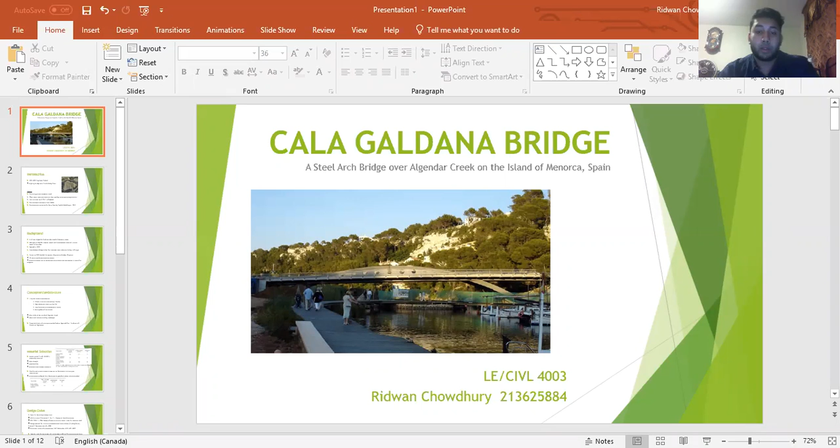Good evening. My name is Ridwan Chowdhury, and welcome to my presentation about the first stainless steel vehicular bridge in Europe. Let's get to it. All right, so we'll start off with an introduction.

So when I first set out looking for projects to research for this project, I was actually pulled towards bridges. And this is mainly because our CIVL 4000 project is actually a highway bridge over Credit Valley River. It's actually a reinforced concrete box girder bridge. Although our specialization this semester wasn't in structural, I thought it'd be interesting to learn a bit about a road bridge that utilized steel instead, and possibly use that knowledge for capstone as well.

So let's start with a little history of bridge materials, get some historical context. So the earliest bridges actually were made of wood. Following that, began the use of stone and low-quality concrete. Iron wasn't used as the primary bridge support until 1741 in England. Steel eventually became a common material in bridges in the late 1800s.

In 1912, an English metallurgist named Harry Brearley was actually looking for a corrosion-resistant solution for gun barrels, I guess very likely for wartime. So long story short, the start of the industrialization of stainless steel was around the early 1900s. And it didn't take long for stainless steel to be recognized by prominent engineers. So now that we have some historical context, let's move on to the project of concern.

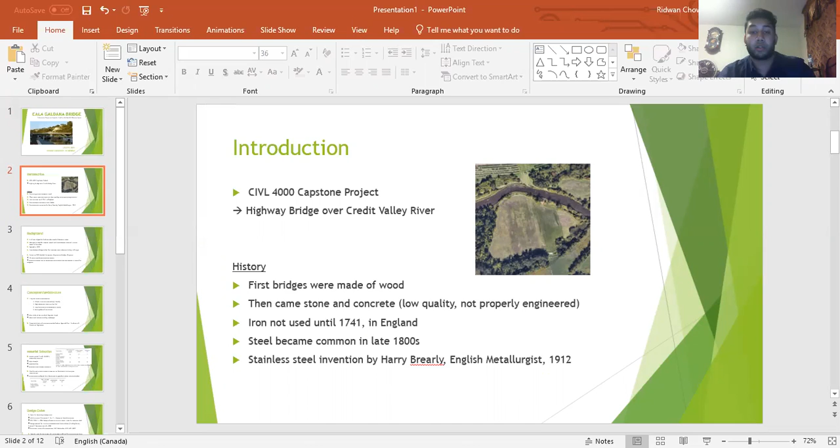So we'll start with some background. So this steel bridge was built on the rocky coast of Menorca, Spain. Menorca is actually a Mediterranean island. It spans 55 meters over the Algendar Creek, and it opened in 2005. Cala Galdana is one of the most beautiful beaches around these islands, so that's the name of the bridge itself.

So why was this bridge even needed? Why was this project even conceived? Well, it was needed to replace the previous bridge, which was made of reinforced concrete, which had become corroded due to the marine, saltwater, and coastal environment. Basically, it had lasted 30 years until finally the owners decided in 2003 that it was time for it to go. Yeah, that's pretty much a little background on the bridge itself.

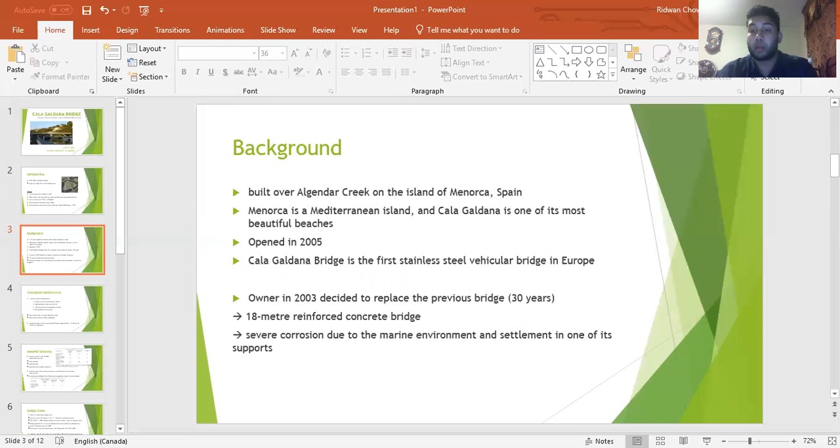So let's go into conception. In terms of conception and architectural design, in 2003, the owner had 4 key requirements for the architects and engineers at Pedelta. Pedelta is the firm responsible for the bridge design as well as architecture, and they were based in Barcelona, Spain. The 4 requirements were that it had to be environmentally friendly, it needed high durability, so a long service life, it required minimum maintenance, so lower maintenance costs,

and it had to be a symbol of innovation as well. And the width of the mouth of the creek, which the bridge had to cross over, was around 40 meters, so another constraint there. Tourism revenue is also very important in this area. So a material which blends in with the natural surroundings and causes minimal disruption. Quick construction was heavily required and desired. This eventually prompted the choice of stainless steel by the firm responsible, but we'll get to that in the next slide.

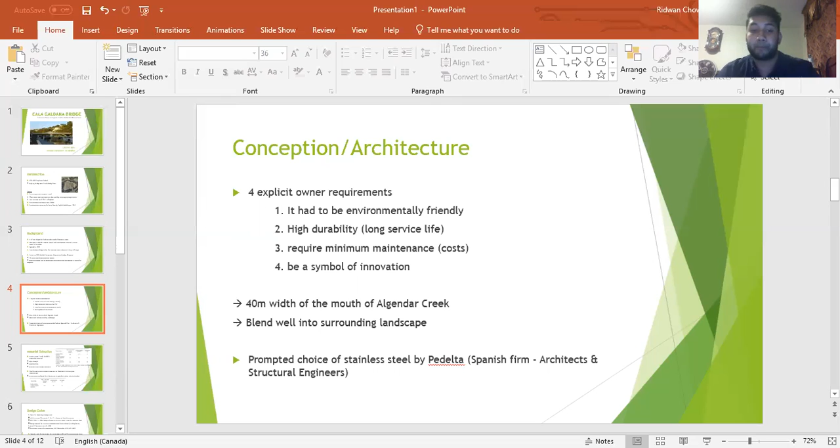So material selection. Due to these different requirements and objectives, different grades of carbon steel and stainless steel were considered. And these were considered rather than concrete, given the issue with the previous bridge. This was also to appease the innovation request, so as to have the first stainless steel road bridge in Europe, which is a pretty big feat in itself. The table in the top right of the slide was taken from a European standard, and it shows the grades considered when selecting the material. The duplex grade 1.4462, you can see that in the 3rd row of the table.

It was eventually selected because of its high strength, exceeding most regular steels, because of its high ductility and durability in marine environments, resisting corrosion from chlorides, as we learned in class. Post-construction quality control tests were carried out to make sure everything was fine, and they exceeded expectations for the material. Another point to note is that stainless steel is 100% recyclable, and a large percent of it is made via recycled materials. So this also appeased the environmentally friendly request as well.

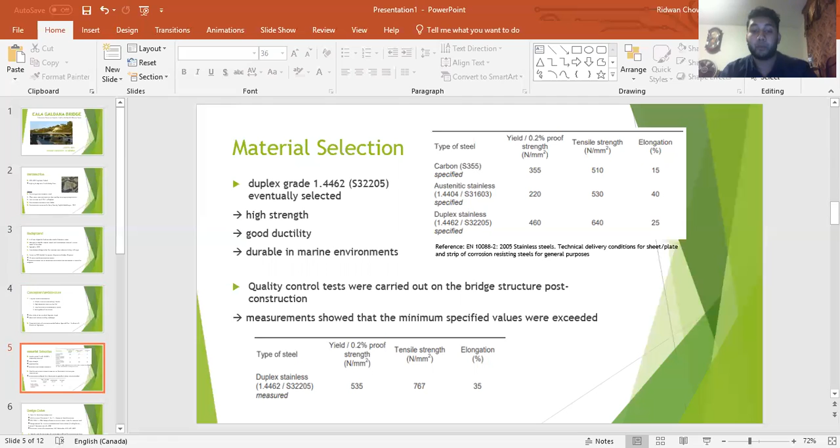Well, let's get further into the engineering part a bit more. The governing code used was a Spanish code for design of steel bridges. This was key for making recommendations in regards to compliance and obviously the verification of resistance at the ultimate limit state, ULS, and the serviceability limit state, SLS.

The other codes or standards used were similar to the steel handbook that we've studied throughout this course. Even comparing their table of contents, there was a lot of overlap. That would be expected, of course. Some of these design manuals include the Eurocode 3 Part 1-4, design of steel structures, as well as manuals for stainless steel specifically.

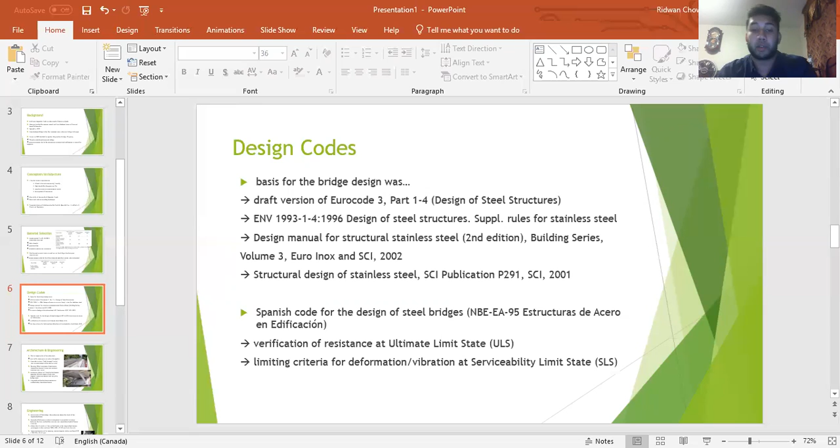Moving on, let's get right into the design. So the bridge covers 40 meters width of the creek, with a 55 meter total length, but the main span of the bridge is about 45 meters. The deck is 13 meters wide. It encompasses 2 lanes of traffic and 2 pedestrian walkways, separated by a low concrete wall and arches, as you can see in the image in the top right. It'll help you visualize it.

According to the Spanish code, the typical ratio of rise to span for a steel arch bridge is in range from 1 to 5 to 1 to 6, because if the arch is too flat, the secondary bending effects can become extremely large and result in a pretty uneconomical design. Bearings were fitted into the base of the abutments, and they transmit the horizontal forces into inclined stainless steel struts rather than into the foundations.

So the arches are joined to 2 longitudinal beams spanning the full length of the bridge. The bridge behaves like a self-anchored arch in this way, and that's helpful because you don't need ties then. Longitudinal beams support transverse beams as well, you can see in the picture in the bottom right, and those carry the bridge deck. Composite action between the deck and the transverse beams is achieved by shear connectors, and those are welded along the transverse beams.

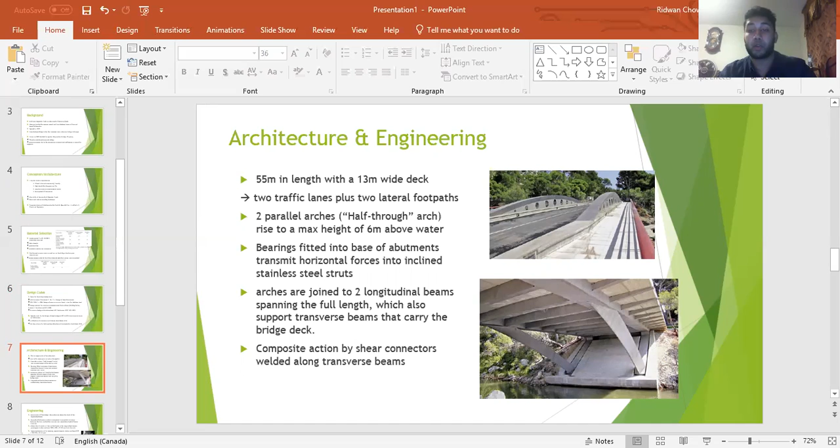All right, if we continue on, we can see that the arches have a triangular cross section with a central web and a depth of 700 millimeters. In the central zone of the bridge, the arches actually rise above the longitudinal beams, and throughout the zone there's a cellular steel plate connected vertically between the two, so that the cross section is almost kind of like a hybrid I-beam structure. You can see in the picture in the bottom right. This allows direct transfer of the vertical loads in the longitudinal beams into the arch.

The transverse beams are at 2 meter spacing, and the rectangular hollow sections are 250 millimeters wide. They have variable depth from 500 to 570 millimeters, and this actually enables the deck to have a cross slope, which is important because the wearing surface needs a cross slope for drainage purposes.

When rainfall falls onto the road, you don't want it to be stuck in depression storages. You want it to fall to the side where the drainage can lead it to the stormwater pipes or whatever drainage system is on site.

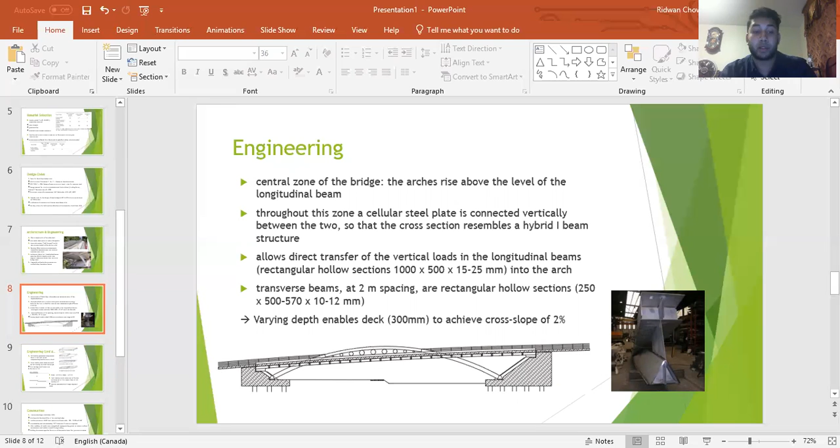The thickness of the beam sections varies between 10 to 12 millimeters, and they are connected to the longitudinal beams beneath and to the concrete deck above as well. And they're connected by 20 millimeter diameter steel shear connectors. That's about it for this slide. There's a side profile of the bridge, which is quite helpful.

And well, almost done. So, of course, using all these parameters that I mentioned, the steel members were decided based on loading cases, the worst loading case. But first, you'd have to estimate the AADT values, annual average daily traffic values, and also the DHV, the design hourly volumes, to get an idea of how much traffic there'll be, so you know how much load to expect.

With a few preliminary calcs and manual calculations, you can simplify. I'm actually simplifying this quite a bit, but just to see the comparison. For the full loading, the max deflection would occur at L/2, with the max moment equation approximately being WL²/8. Whereas with half loading, the max deflection would occur at L/4. So that makes the equation for max moment now WL²/32.

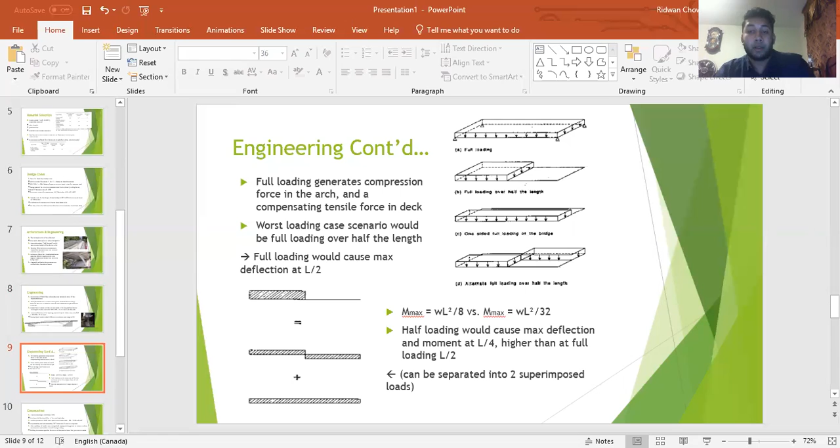And construction, to end off, the last aspect. Construction actually began in October 2004, starting with the demolition of the existing bridge. The welding processes used, as we learned in class, included SMAW, inert gas, covered electrodes, MIG, FCAW, and SAW, without preheating and not exceeding 150 degrees Celsius between two consecutive passes.

As you can see on the slide, after welding, all weld areas were pickled. Pickling is a process where we apply pickling paste to prevent oxidation or remove surface contaminants created during welding. So this is very helpful, and it also encourages the formation of the passive layer, which prevents corrosion, as we learned in class.

The main stainless steel structure was assembled on site from 8 sections. Each section was lifted on temporary supports. This facilitated welding, and all welding was controlled using standard methods of visual inspection, X-ray, magnetic particles, etc. The final cost was 2.6 million euros, completed in June 2005. So from conception to end of construction, it was about a 2-year project.

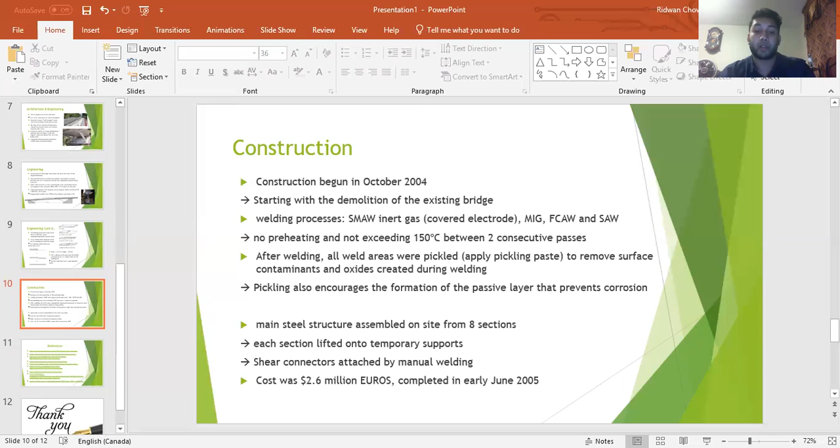And we're finished. These are some of the references I used to gather my information and research the 4 themes or aspects of this presentation.